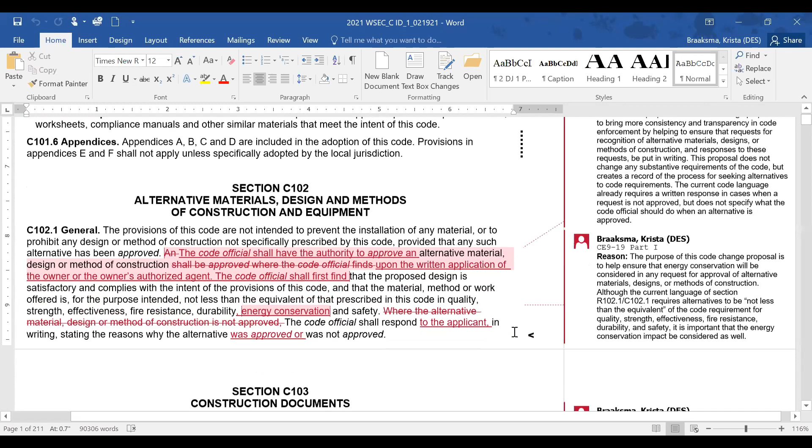So moving on to section 102. There were some minor changes to make the codes consistent in the administrative portions. It doesn't really do a lot to the energy code itself. They did add energy conservation in as one of the goals of the code.

And this just allows digital submissions. So I guess silence in this case means nobody has a concern with the change that we've all gone through. Just to make it clear.

And then specifying that the construction document should include which energy compliance path is being taken.

There was a slight change in the IECC language on air barriers, and I've provided both the ICC language and the current WSEC language. I'm kind of assuming we would continue with the current language, but if people prefer the ICC language, we can go that direction as well.

So can we make those determinations as we're going along right now today? That would be my assumption. I'd hope we would do that.

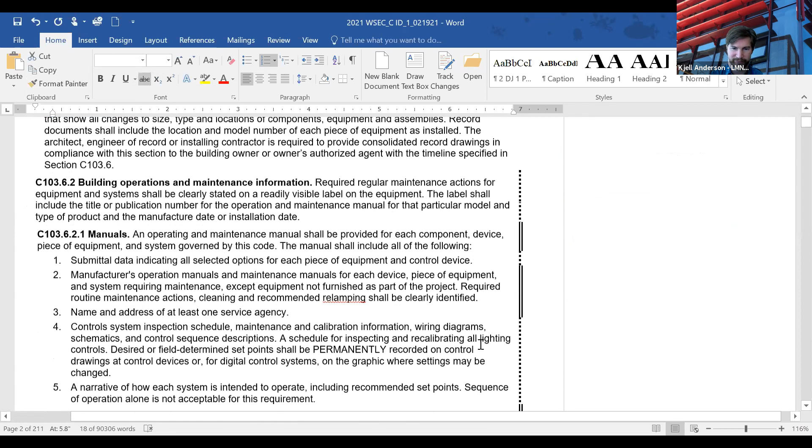And this is just a relocation. Fees got moved up from its previous location, which then bounced down inspections. Inspections did get divided into two different sections, and there's now a new notice of approval section that takes the place of two previous subsections of inspections.

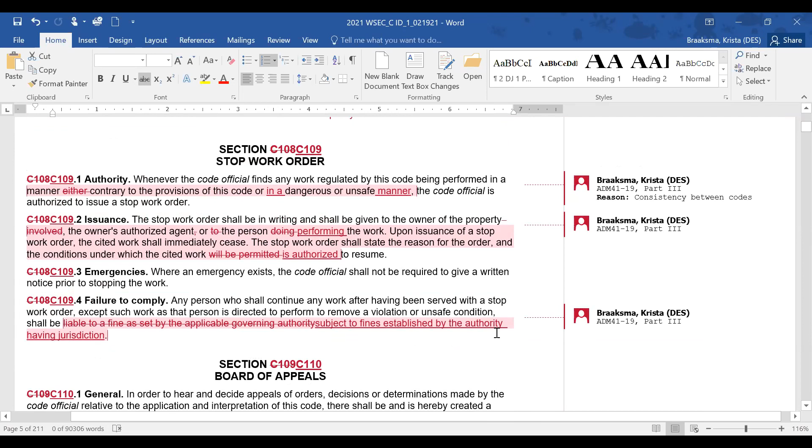And these are just the relocation stuff. Stop work order, again, there's changes just to make it consistent between the model codes. It's pretty much just editorial.

Lisa, did you have a question? You chatted something. Okay. Sorry, I had to unmute.

Actually, this is back, I forget which section it was, when it refers to the energy compliance path. My only question on that one is, is it in reference to section C401, or is it in reference to the compliance path by discipline, like prescriptive versus performance, that kind of thing? Do you know?

This was prescriptive versus performance. Okay, yeah, so that was my understanding. Okay, so C401, the two choices. Okay, thank you. That could be more explicit in here, and I had that confusion as well.

As if we're saying energy compliance path, how are we naming them such that people know what to put in here? I could say energy compliance path per C401 or something like that. That might be clearer. Is that something you would agree with, Lisa? Yeah, I think that would provide some clarity.

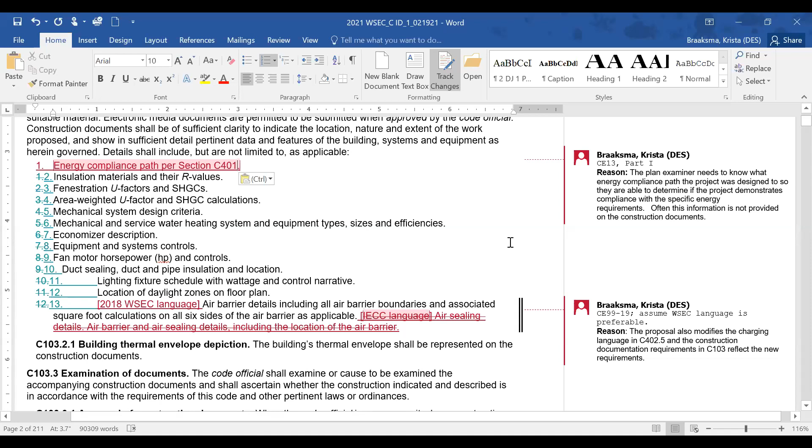So the above grade wall definition took out the word basement from basement knee walls and just called them knee walls.

Sorry, clock in the background. Two definitions were added for biogas and biomass to coordinate with language coming up in another change, it looks like C406.

So if we determine that we don't want to adopt any part of the IECC C406, there's really no need to have these two definitions, but they don't hurt anything.

So just to be clear, Krista, when it says reason, is that copied directly from the IECC rationale, or is that your editorial? It is copied from the original code change proposal at ICC. It is somewhat modified, just to take out a few words here and there to shrink it down. Some of them are several paragraphs long. Okay, thanks, but that's what it's based on.

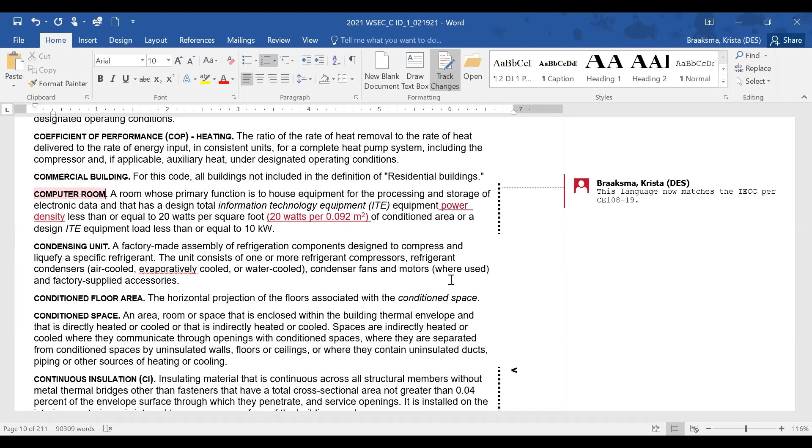Same with data center and data center systems. Well, data center anyway. Data center systems is a little bit different.

So we have a choice here, right? Krista, anybody have an opinion? ICC is a little more specific than the Washington State Code.

Lewis? Yeah, and maybe Mike Kennedy can chime in on this one, but we spent quite a bit of time on the data center last time, specifically for Washington State. The proposal that went forward to ICC came from Washington State. So I think it might be better to leave the Washington State language, but I think Mike Kennedy would have a good purview of this. Mike? Mike here.

I would like to research this offline and come back next time with it. I'm wary of the electrical systems because I know the proponent was very specific that electrical systems should be in there, and that relates to the content of 90.4.

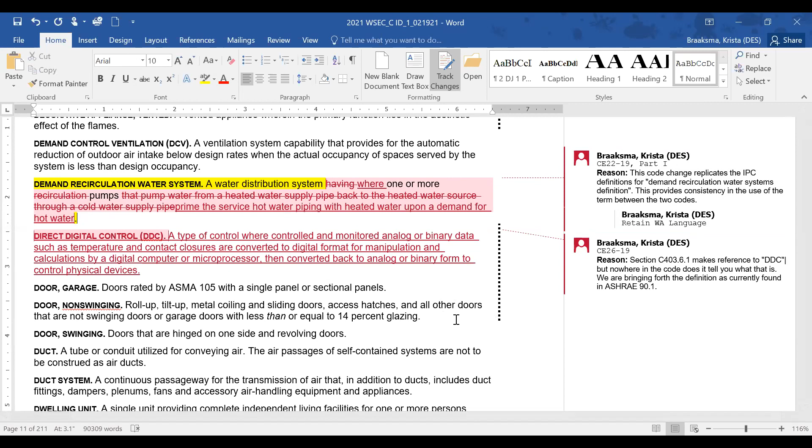Okay, and there's a new definition for direct digital control. A new definition for enthalpy recovery ratio. And I don't know if you'll want to revisit that after we actually go through section C403. That I guess would be consistent with a lot of these definitions. They may need to be revised after we look at the referencing section.

A bunch of new fan system definitions. Sorry, Lewis has a question. Go ahead. Yeah, I'm sorry I missed that. Are we going to revisit these? Like that enthalpy recovery ratio will be probably pretty important for the DOAS section. Are we going to get a chance to go back and take a look at these, or are we making a decision on them now?

I think we can come back and take a look at it later, so when we meet again we can revisit anything we covered today if necessary. Ideally you'd make a note, or when we get to that we'll automatically come back to it if you bring it up. Most of this deals with Washington State code provisions, definitions changing like data centers, or heat recovery and DOAS systems, which were hot topics with lots of time spent in previous discussions. So if we get time back, we'll focus on that and bring it up for discussion later.

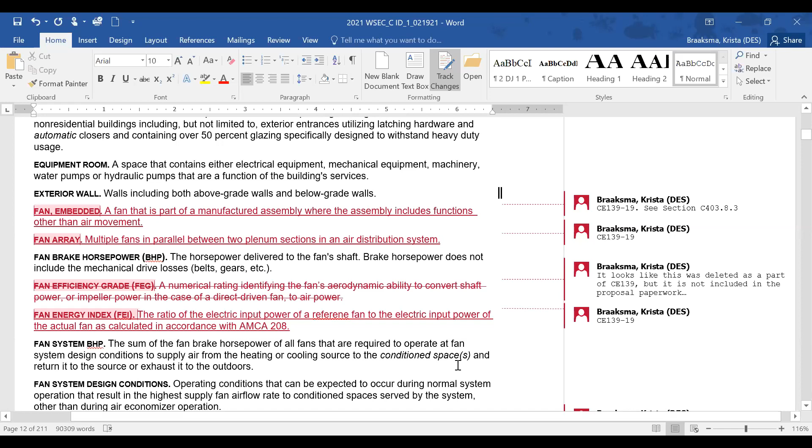And a new definition for fault detection and diagnostics. The fenestration definition for skylights now includes greenhouses.

Luke has a question: Krista, could you scroll back up to the fan definitions? There was a spelling error in fan energy index. There you go, thank you. You're not called the technical advisory group for nothing. It's Luke, sorry, I figured we'd get it now.

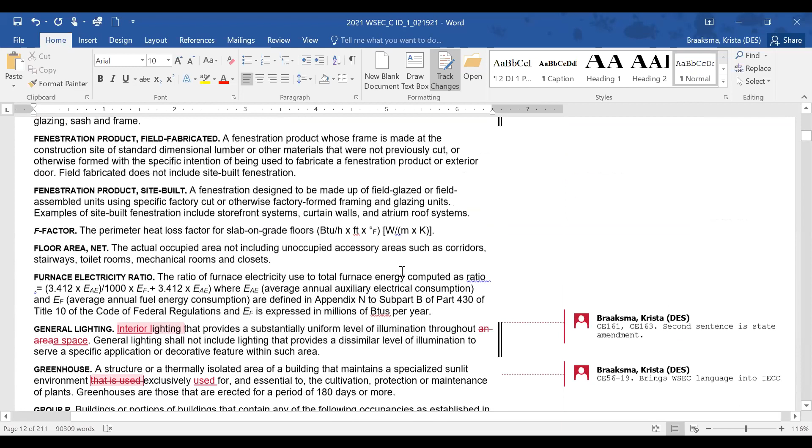The definition for general lighting looped in a requirement that specifically addresses interior lighting and general lighting.

The greenhouse definition is pretty much in line with our current state amendment now, just a minor editorial change. Luke, can you lower your hand, or do you have a question? Amy, go ahead. Krista, can you scroll up a little bit? Yeah, there it is, skylights—I just saw greenhouses was added. I just wanted to make sure it made sense. Thanks.

And the ITE definition is pretty much the same as the current state definition, just reformatted to match the ICC format a little better.

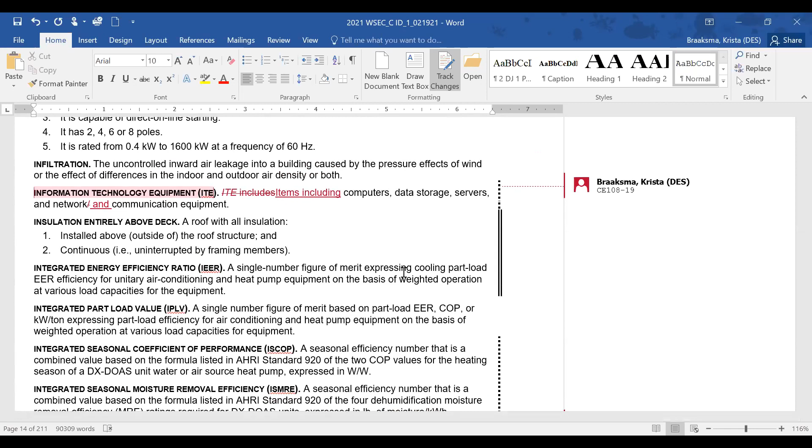A new definition for internal curtain systems for greenhouses, and there's a new section in the fan section for large diameter ceiling fans now, so there's a definition included.

Some editorial changes to networked guest room control systems.

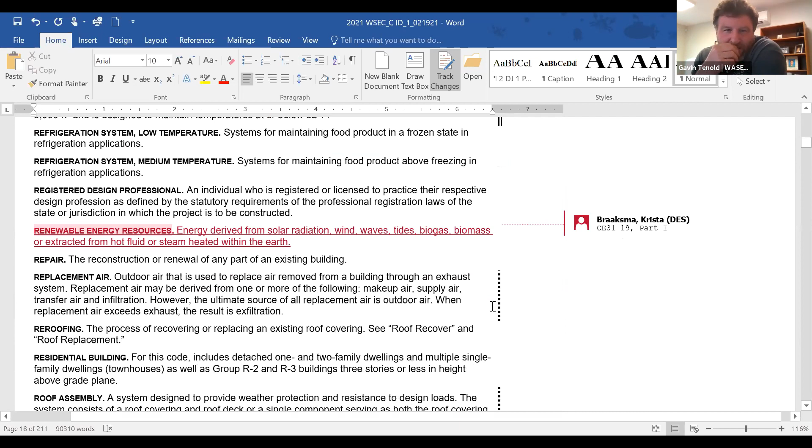Gavin has a question. Go ahead, Gavin. I wanted to comment on on-site renewable energy—sorry, I pushed that button a little too early. So Krista, my understanding is the part crossed out is what had been in our code, and the highlighted part is what's in the ICC code we're looking at including in the 2021 code. So the crossed out portion is the 2018 Washington State Energy Code, and the pink underlined section is the IECC 2018 or 2021. I sure prefer the Washington State language better—just wanted to comment on that. My logic is it's about renewable energy resources, and I think we're opening up an unclear definition there that could turn into an issue. Just to jump in, there is a definition for renewable energy resources added later. So there's one further on in the R's here? Yep. So is this list basically the same list that was in the previous definition? Looks pretty much like it, yeah.

You just have to look at two definitions now instead of one. Does that address your concern, Gavin?

Well, I guess I'm wondering, I haven't read it carefully enough. Does it have the original sources of energy there? Or is there anything missing? Looks like landfill gas wasn't included in the second definition. Unless it's assumed that that's just a part of biogas.

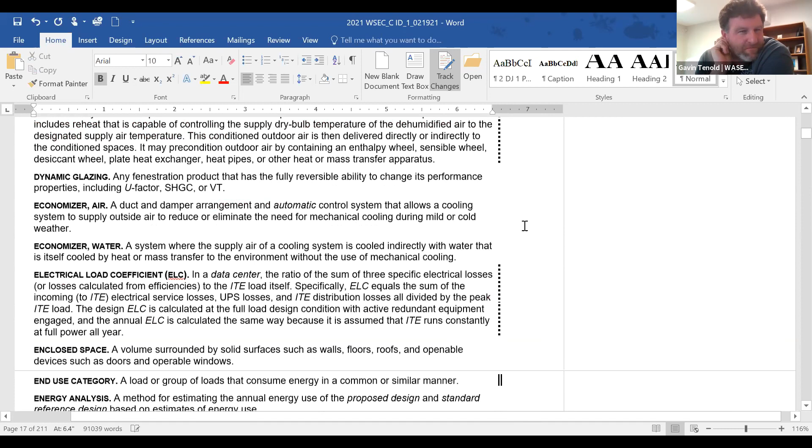That was my assumption, but if others have other thoughts. Biogas to me is something that you're doing in like a digester. Landfill gas is another thing entirely, but I'm not a biodigester guy.

Lewis or Dwayne, I think you raised your hand before, Lewis. Yeah, I think one important difference is that in the renewable energy resources, at the I-code level, we decided not to include biomass, just because the typical building doesn't have enough biomass on site to supply its own energy resources in perpetuity.

Yeah, like you'd need 2 acres of forest maybe, or 1 acre, or something like that in order to actually consider it a renewable resource. Well, in order to harvest it on site. Yep. And so I thought that was actually a good change.

I'm in favor of the new. Okay, perfect. Yes, sir. Thank you very much. Appreciate that. Someone needs to, can we mute that person? Got him. All right. Someone like your idea, Dwayne.

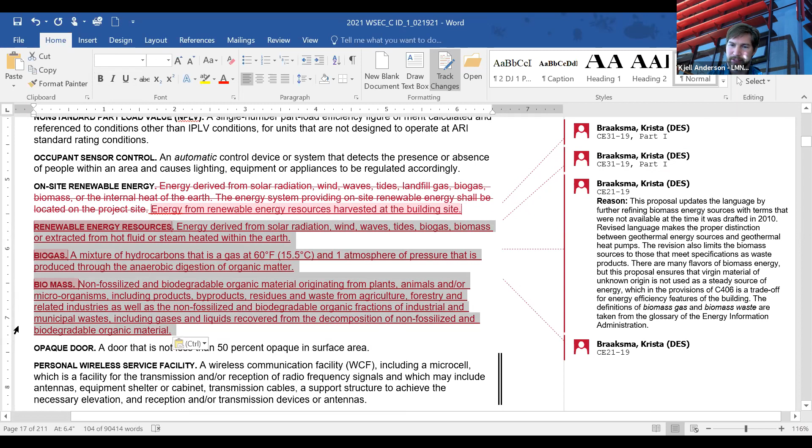So if that's the case, then the new definition seems to be acceptable based on the comments I've heard, because it does include the biogas. Previously, you just have to look at other definitions in order to do so. Does that make sense?

He has questions there in the chat. Dwayne. I just wanted to point out that one of our other usual objectives here is to minimize the differences between the national standard and our Washington code. So here's a situation where, without really changing anything fundamentally in the meaning, we can align ourselves with the IECC.

I agree. Lisa? I'm going to second what Dwayne just said about aligning with the IECC, and also if those other definitions do remain, then I think technically the words renewable energy resources is a definition, so it would be in italicized words. So we've got a definition inside of a definition. But that would be the case there, I believe. That way folks know as they're reading this definition that there are other places to look for additional information, which could help the discussion we just had.

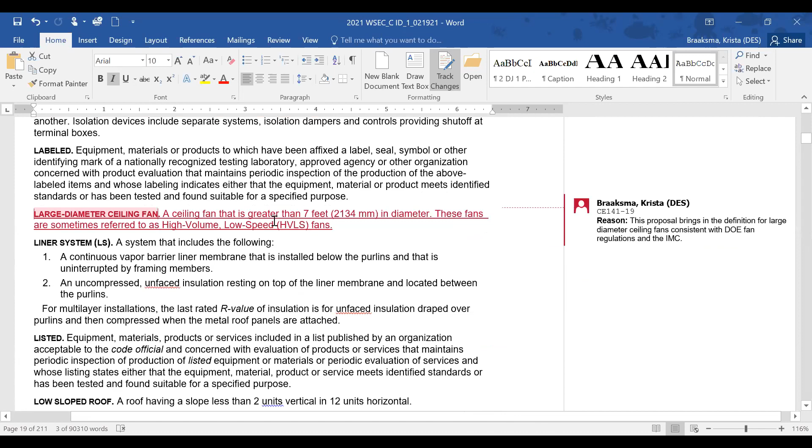Mike Kennedy has something, go for it Mike. I thought this was going to be down on vertical fenestration, but it's up in fenestration, a sub item is vertical fenestration. There's a typo, and I don't know if this is proper to deal with now. There's an error in the Washington 2018 code where doors with no more than 50% glass are considered vertical fenestration. I think that should be more than 50%. That's correct. Or 50% or more, either way. Great.

Okay, and then Alan brought up a spelling typo in TDD. Mike, did that answer your question? Can you lower your hand if it did? Oh yeah. We're all still trying, got training wheels on. Yeah, I think we'll have that for a while. This is kind of a new format for tags, and it takes some getting used to.

A new definition for vegetative roof, but it's in a section that we don't adopt in Washington, for solar reflectance. So whether it's adopted or not is up in the air.

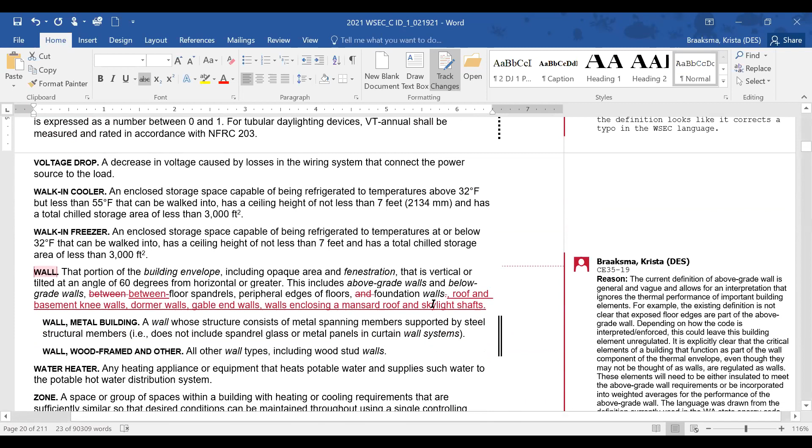So there's a change to the definition for wall. I'm not sure why they put basement back in on knee walls for this one, but above grade wall doesn't include the word basement. Two code cycles ago, or at least one cycle ago, we had a great definition which seems to have vaporized. We had one definition for below grade wall, and the above grade wall definition was from top of floor insulation to bottom of roof insulation, meaning everything in between is wall, and it was golden. This has a whole bunch of stuff in there, but it doesn't exactly say that.

Then we should add that. I don't have my old code books in this office, but if I was in my other office, I could put my finger right on it. That sounds like a code change proposal just waiting to happen, Patrick. Oh really, all that extra paperwork, Joe? Now I have to start making a list.

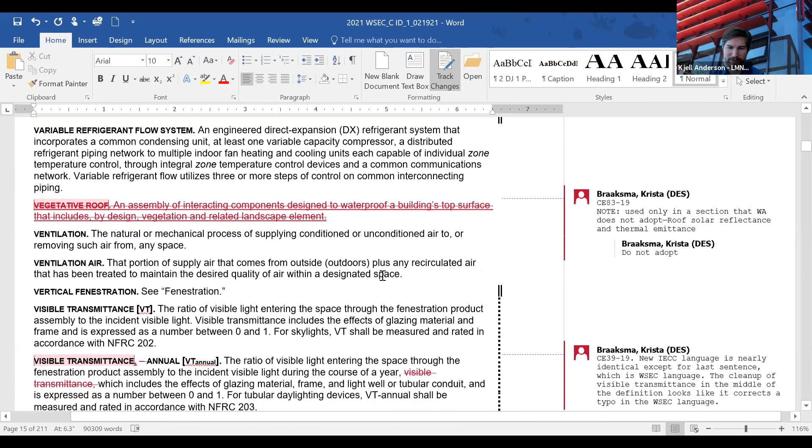Woohoo, we are almost 10% the way through the 211 pages of the code. And there was a new climate zone introduced for Washington. We've got 4C, 5B, and 5C. So you've now got 2 marine zones and a dry zone, which there are some requirements within the code that has a difference between 4C and 5C requirements, and 5B and 5C requirements. So this does have some code impacts.

Some further detail added to the insulation mark installation, on just how you mark items that don't have a printed mark.

Dwayne: Yeah, I'm having a hard time. I'm looking at the IECC climate zone map, and I'm not seeing that 5C. But I wonder if this is appropriate to treat the same way we treated our friends up in the upper right-hand corner in Zone 6, that we made them honorary members of 5B. Do we really want to have a new climate zone for, what is it, San Juan and Kitsap and Clallam? So it's funny because I'm looking at this map and I don't see it at all here.

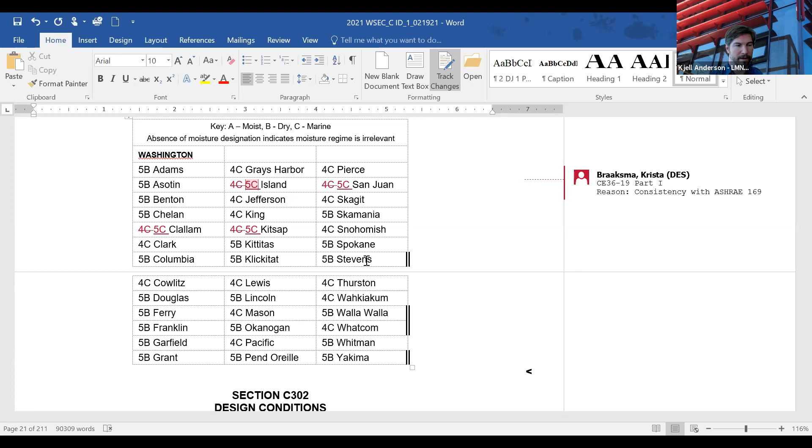Mike Fowler was the next person to raise their hand. I had similar thoughts to what Dwayne was just mentioning. And what I was also trying to recall, is there still a state statute that we have? The state statute says we have 2 climate zones in Washington. I couldn't recall if it was part of why we moved 6B into 5B. And also just to agree with Dwayne, my thought was just saying let's maintain or move 5C back to 4C. And yes, that is still state law. I agree totally. And just for example, like the population of Grant County, which is a large county, is only 40,000 people, and I think these are even smaller.

Well, Kitsap is not, but Clallam.

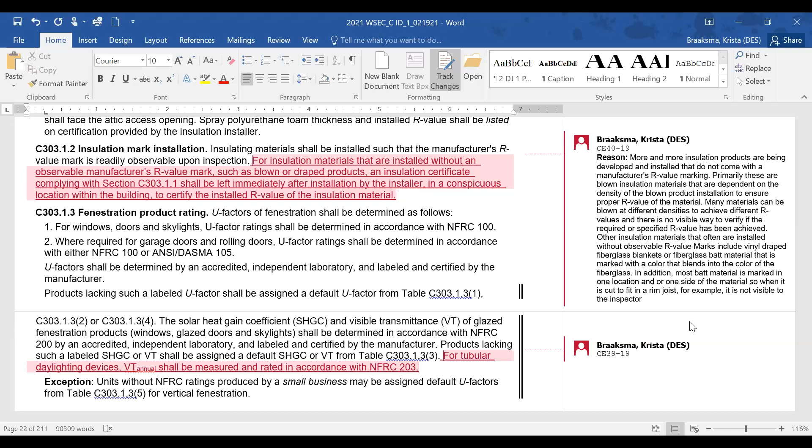So were there any comments on the insulation mark? And the fenestration product rating, just some additional clarification on tubular daylighting devices. And that's consistent with our current state amendments. And that brings us to chapter 4.

And C401.2 was changed around quite a bit. And I'm hoping I caught all of the sections and coordinated them with the Washington State sections.

The total building performance path now includes the IECC version, includes the table for mandatory provisions that are code introduced last time. And the application to existing buildings has been changed into an exception rather than a subsection on this one.

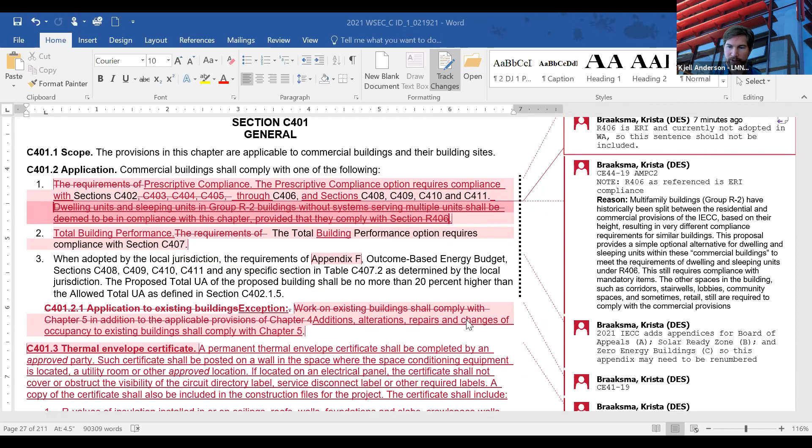Okay, so the inclusion of additions does make it a bit circular because additions under chapter 5 require you to go back to C401 and various other subsections. So I guess, do we feel that if it's an exception in its own pathway, but that pathway then also requires other things under C401, is that so circular that people will be confused or building officials will be confused?

I'll just chime in that I think it really is the word exception that's the issue. If perhaps we just kept it as application to existing buildings, but kept the edit, that might be a little clearer. Anyone who wants to use some emoticons in support or denial of that idea?

I like that idea as well. The titles of sections are not actual code language, from what I've heard. But calling it application to existing buildings is better than calling it an exception, because if you call it an exception, then it is code language. So let's use the new language, but the old title.

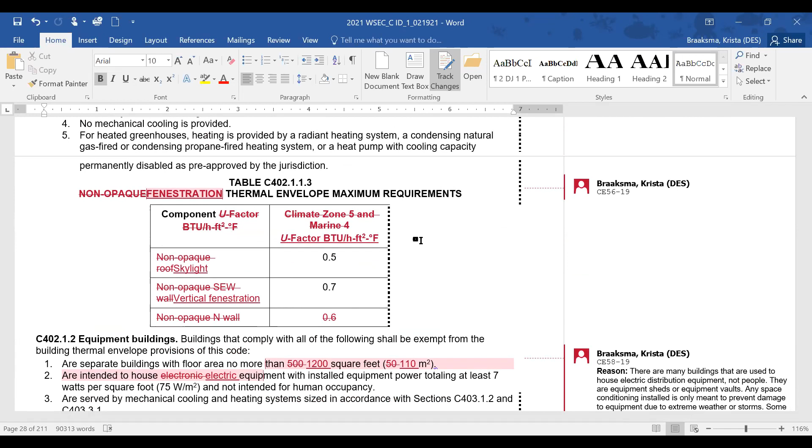Mike Kennedy: I wanted to say, I kind of like the simplicity, but it is a decrease in efficiency, since you're allowing north surfaces to go with 0.7 instead of 0.6. But the simplicity is nice.

Lisa: I have two comments. For this, I would agree with Mike that it is a step back. We could say vertical fenestration southeast and west, and then vertical fenestration north separately. That way we would maintain the existing stringency. It would be a step back otherwise.

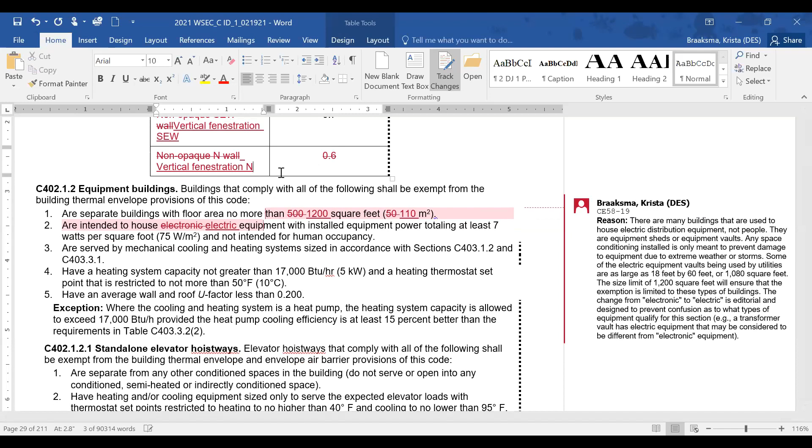While we have the floor, I have a comment about the equipment building section as well. This is technically a decrease in stringency, and the vast majority of these buildings are permitted through L&I, so this is one where perhaps it would be advisable to

consult L&I about this particular change. Does somebody have a connection at L&I that they could get more information from? Yeah, we could reach out to L&I, it would be Craig Sedlak or Kelly Mayo, either one, just to let them know about it and find out their opinion. Sure, that sounds great, I'll send a quick email to Kelly and Craig today.

Dwayne: As to that point, this is a decrease in stringency and we should not put it in there. We're saying instead of just 500 square foot and smaller buildings being exempt, now we're saying 1,200 square foot. This should be somebody's code change proposal and not in the integrated draft.

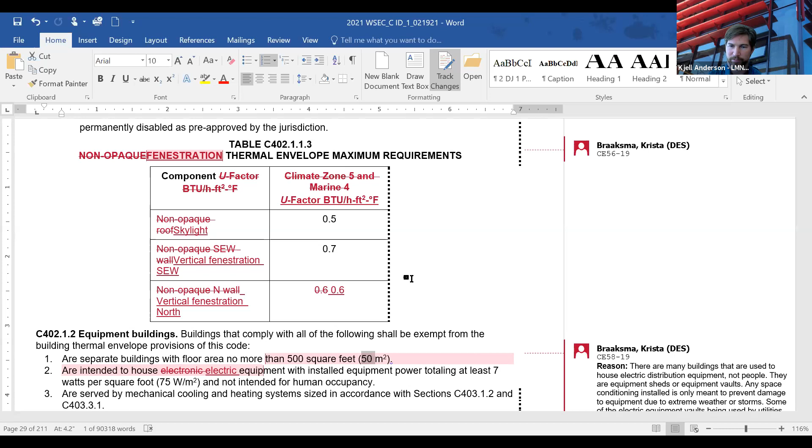So to the point where we don't go backwards, it sounds like we would need to maintain what we had in that table above. It seems we'd need to maintain the 500 square feet and then entertain a proposal to increase it if that's a burden on entities and we have other energy saving measures that would make up for it. Regarding the table above, it would be moving backwards to allow all fenestration to be 0.7. So we would need to maintain what Krista has currently written up there, and then entertain code change proposals to see if the TAG wants to make a change.

Okay. But to Dwayne's point, I guess we can look up whether 0.7 is worse than glazing required elsewhere.

So the next change is on the insulation component R-value method, with just some further specification on multiple layer.

Lisa has a comment. Sorry, one more comment about the greenhouse. I also think it would be worthwhile to confirm that fenestration is actually the appropriate term for what we're talking about, because these are greenhouse assembly types. Is there someone on the call that's a greenhouse expert that could respond? Because I don't believe they were referred to as vertical fenestration in the product search. I'd have to go back and look at that original study.

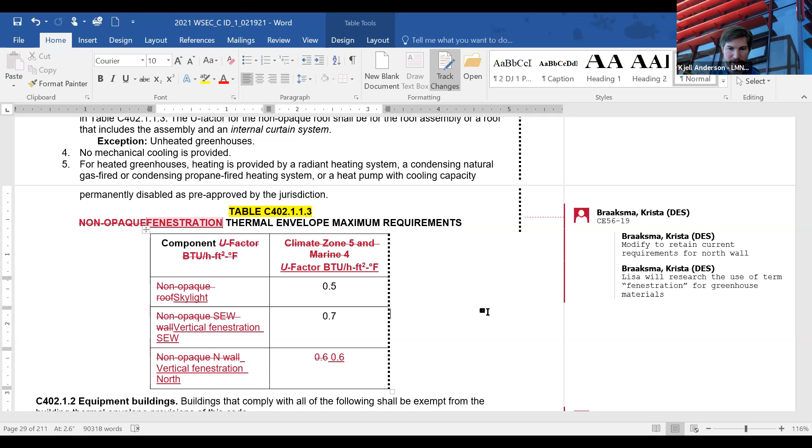Yeah, perhaps we can bring this one back up at the next meeting. We could do some research between now and then. That sounds great. We're almost 15% of the way through the code and halfway through our time. So yeah, I think let's move on and we'll revisit this, Lisa.

Any comments on the insulation component R-value method?

So ICC has some slightly more stringent requirements for metal building R values, and a different assembly for wood framed and other walls.

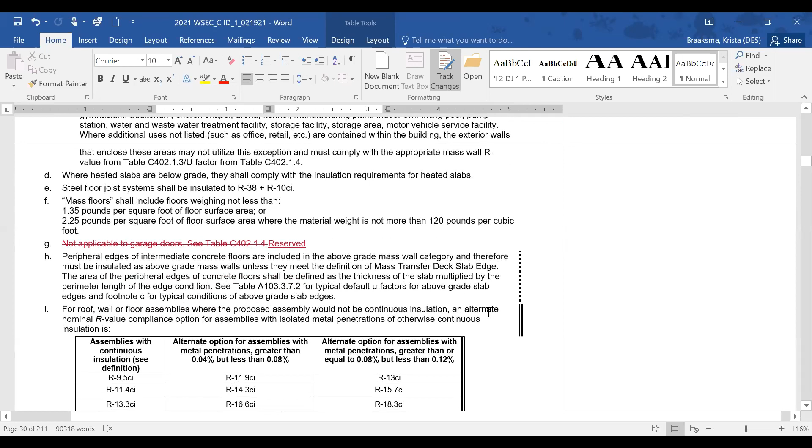And pulled opaque doors off of this table completely and moved it over to the U factor table. And the footnote G went away with that deletion of the garage doors.

A new section was added on roof ceiling assemblies. And the rationale says this was intended to be used for repair and replacement. So I'm not sure why it's here. Oh, never mind, I misspoke reading the actual rationale.

Mike Kennedy. I guess I was not very involved in this, but we have quite a lot of stuff in our Appendix A about not averaging R values, because it's not actually a technically correct way of doing it. It's more of a U value thing. So I'm not sure, I think this might actually weaken the code. I was hoping someone else more involved, like possibly Dwayne in the roof insulation stuff, would be able to comment on that. But anyway.

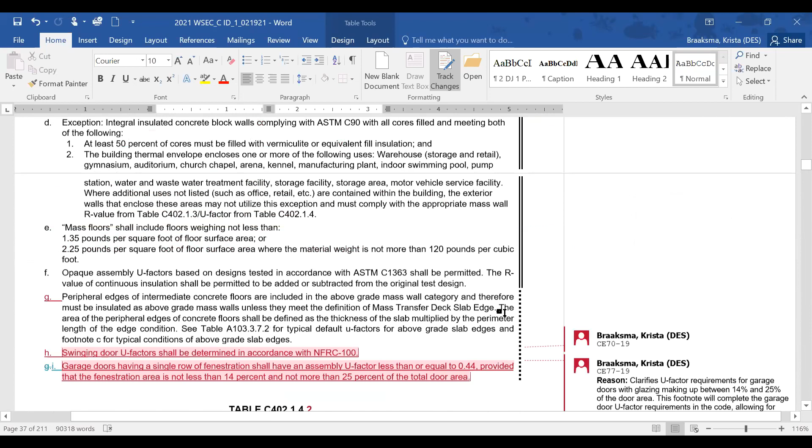Kjell, I think it is moving us backwards. And I have language in the new Seattle code that we worked out with a manufacturers group for dealing with tapered insulation that we put into the appendix.

I would suggest that we strike this tapered insulation thing and I'll make a code change proposal with what we've got in Appendix A. Okay, so we'd strike just C402.1.4.1.1 that Krista outlined?

Yeah. Okay, I think, unless somebody likes that language. Well, whether we like it or not, if it moves us backwards, then we can't choose it.

Okay, that seems reasonable. Mike, you have a question? More a question to Krista, just, I mean, is there a difference to leave it and Dwayne still makes a code proposal in terms of numbering?

I mean, do you have to renumber the draft now, or is it, that's my question, do you have to renumber the 0.1, 1.2, 1.3 below as part of the integrated draft? Or would it be simpler just to leave it and have Dwayne propose it and make the substitution at that time?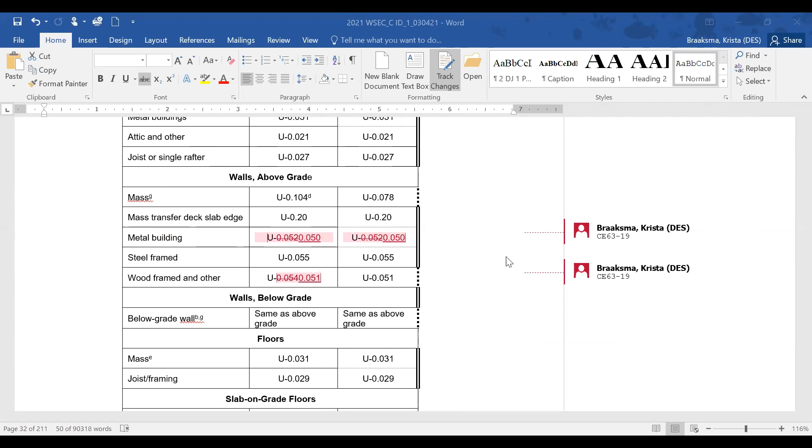Okay, there's a minor clarification to the thermal resistance of cold form steel walls that's just point you to the right table. And some minor adjustments to the U value to match the new assembly types and values in the R value table. And some revisions on the door values and just a little reorganization.

And then 2 new footnotes, one carried over from the previous table, and a new clarification.

Mike Kennedy has a question, comment? Yeah, on the fenestration U factor table, I guess I just was noticing the U factor there is the Washington State 0.38, and the IECC has adopted a 0.36 for, I believe, for fixed.

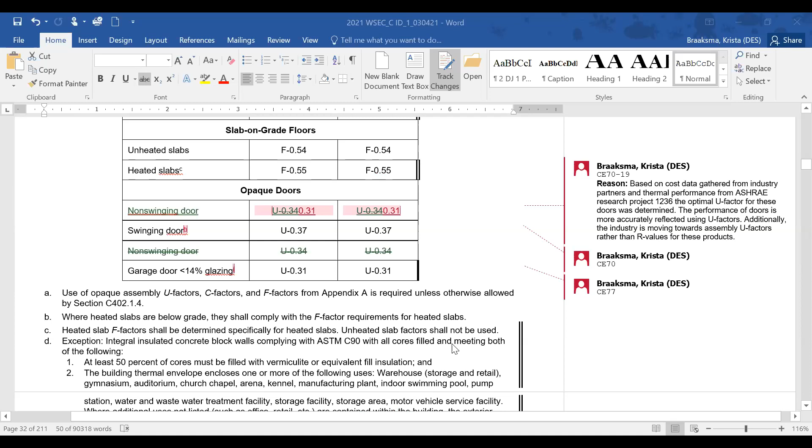Or maybe, so are you down in table 402.4 or? Yeah, 2.4, the fenestration table. Sorry.

The fixed U factor of 0.38 is from the Washington Energy Code, but the IECC fixed fenestration requirement now is 0.36. I didn't know whether that was something we'd want to adopt as part of the integrated draft, so just bringing it up.

Wouldn't that be for all others rather than the Class AW windows though? That was my assumption when I was doing the integrated draft. They don't make that distinction, so all fixed fenestration is 0.36.

What you're looking at in this table is aluminum product, non-metal, metal fixed. So if someone wants to change it from 0.38 to 0.36, that should be a code change proposal. That's the IECC value at this point.

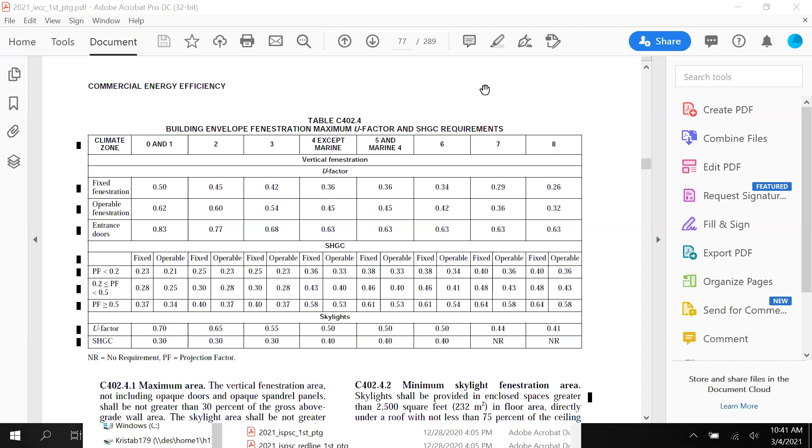I do a lot of window wall projects, and they have aluminum operating casements, and about the best U factor you can get out of them with the best class is like 0.42. So the 0.45 aligns with that.

Entrance doors, NFRC tested, average about 0.58 for a U factor. And when we break out punched opening vinyl in a separate category at 0.30, and then fixed aluminum at 0.38, lowering the fixed aluminum to 0.36 and just leaving our table the way it is would not be bad or a hardship for anybody.

Yeah, I think based on the comments, we need to put this in the integrated draft, the 0.36 for fixed fenestration. And then based on the comments, we should probably also include the operable solar heat gain coefficient that I've also outlined in red into the integrated draft. Does that make sense?

Anybody, everybody? I think I'm going to put in a code proposal. Appreciate that, on my list.

I think the SHGC is only better for operable because there's more solid area taken up with the hinges. Exactly, it's how NFRC in therm, you get a lower SHGC due to the mass of the frame of operable windows. Yep.

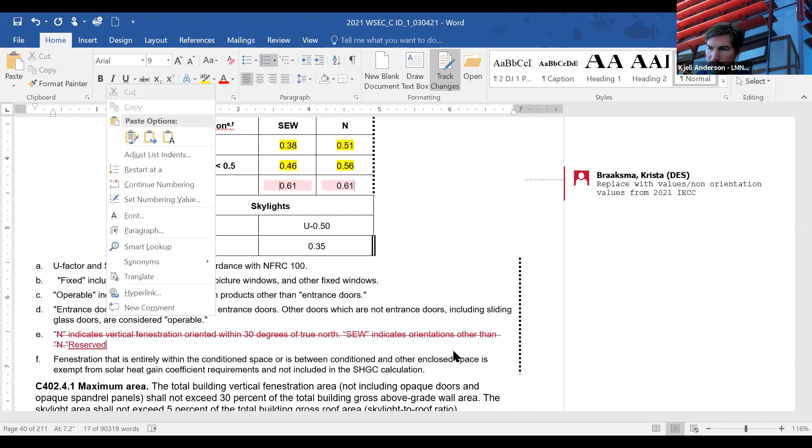Great. I'm glad you're going backwards, yeah, because we had skipped a few things in here. Some additional detail on roof assembly.

And Kennedy, oh sorry, I was having trouble integrating this with our requirements on tapered insulation. So I'm not sure if we should go back to what we had or just wait on Duane's pending code change proposal, or how you wanted to deal with this.

Mike Kennedy, you have a comment? No, I don't specifically on this. Your hand is up. I think if we're eliminating the IECC tapered language, we should maintain the Washington State Energy Code 2018 tapered language, subject to, of course, code proposals.

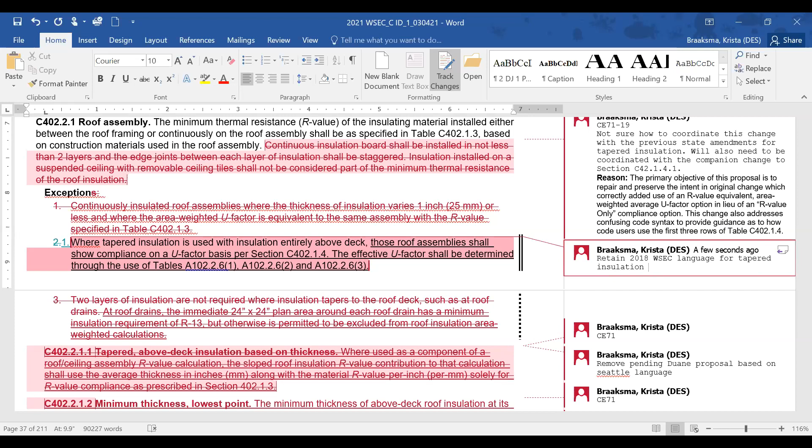Okay, Gavin? Gavin, you're on mute. Sorry, guys. We're not getting rid of the staggering language anywhere, are we? This is just tapering.

Yeah, this is, if we're not incorporating the 2021 IECC language on tapered insulation, we should retain the tapered insulation language from the 2018 Energy Code. Right.

Well, I guess I saw that language down there in 402.2.1.4 where it's dealing with tapering too when you're going into scuppers. I guess I feel like this is a conversation that could get deep.

So you're saying 402.2.1.4, the new language replicates or is similar to other language we already have that we crossed out?

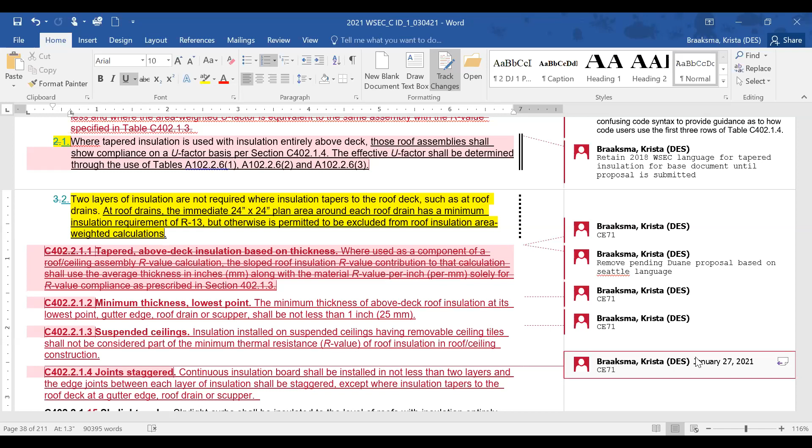Well, the language that Krista's got highlighted is talking about roof drains and tapering. And then 1, 2, 3, 4 sections down, you have the portion that's discussing joint staggering again. And I guess I'm trying to speak up to say staggering joints is really important. And if we're addressing tapering in the previous portion, we need to look at 402.2.1.4 as well. That's all.

Would it be appropriate for this integrated draft to just maintain all of the exceptions - 1, 2, and 3 - and not include the IECC 2021 language, and then entertain a proposal from Duane or others? Would that be more consistent? Because there's a possibility that none of the proposals are accepted, and we still need a document that reads well.

It's something that maybe Duane and I would want to work on together, because between the two of us, we probably see more tapered rigid than anybody.

Does that seem acceptable to everybody, to keep the 3 exceptions and not use the 2021 IECC language below for C402.2.1.1, 2.1.2, 2.1? I guess we might maintain - we would just get rid of C402.2.1.4 and maintain all 3 exceptions. So that seemed like a reasonable path forward.

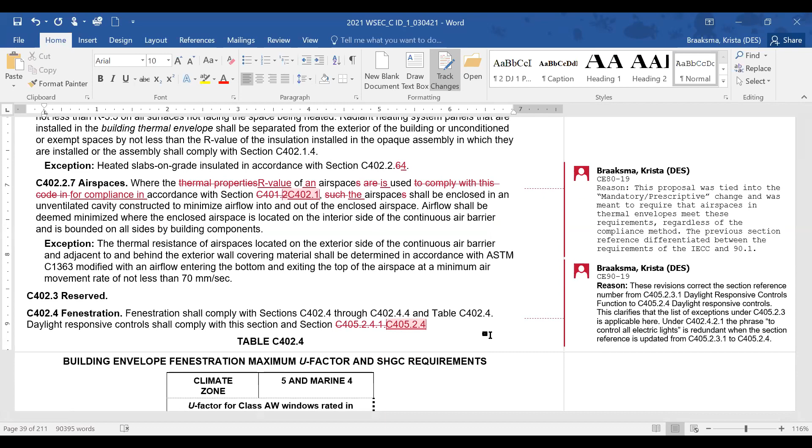Some minor changes to the minimum skylight fenestration area, incorporating the tubular daylighting devices. And ICC went back and forth again, and they're now saying instead of just top lit zone, they're throwing the word daylight back in. So side lit and top lit now include the word daylight after them throughout the code.

And a new exception added for storm shelters complying with ICC 500. You don't need skylights in them, which is probably a good idea.

And just some minor tweaks.

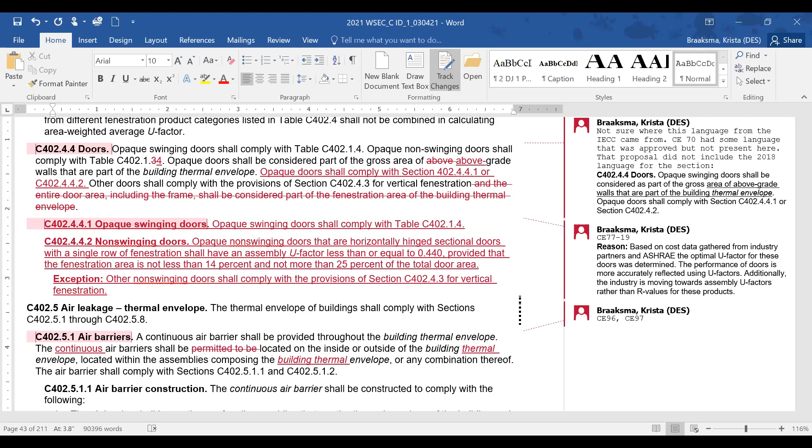I feel like there's overlap here in this 14% to 25%. That's the garage doors.

I'd like to take this. I may have comments on this next time. I'm going to look at it.

Okay, thanks. I'll just say one thing. I can't remember the last time I used a non-swinging opaque door. We use roll-up doors and they fall into a different category. A non-swinging opaque door to me is like a hollow metal door that is never opened, and you just don't do that.

No, it's a defined term, Patrick, under door, non-swinging. I guess my question is, do we need it? You know, opaque door, whether it swings or not, is an opaque door. But it's considered opaque if it has less than 25% glass in it, which is not entirely opaque. But there's only hinged section doors.

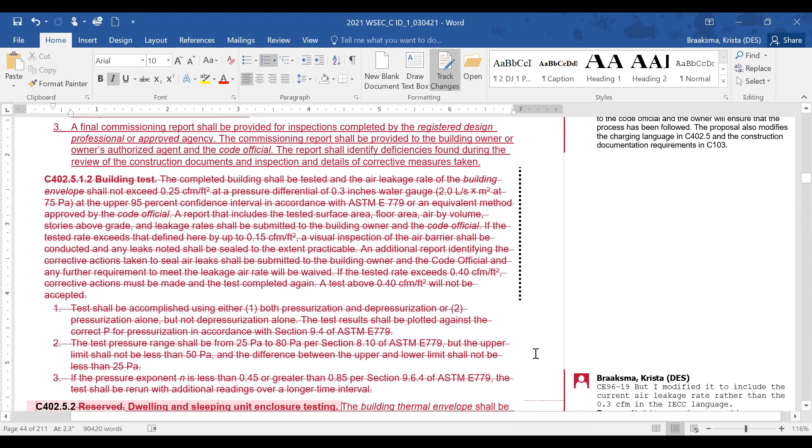And then the building test was divided into the two sections. Mike - yeah, in the second section, the metric equivalent listed for 0.25 CFM is 2 liters per second, but that's actually the metric equivalent for 0.4 CFM. I believe the correct number should be 1.27. And I don't know where the 1.5 above came from, but that should also be 1.27. If anybody wants to check my math on that, that would be great.

But those same changes will need to be made in C406 as well, because I think that's where the 0.25 was, and then we go to 0.17 there. I guess when we switched from the previous language to this, did we miss anything? Is anything missing that was there before that is gone now?

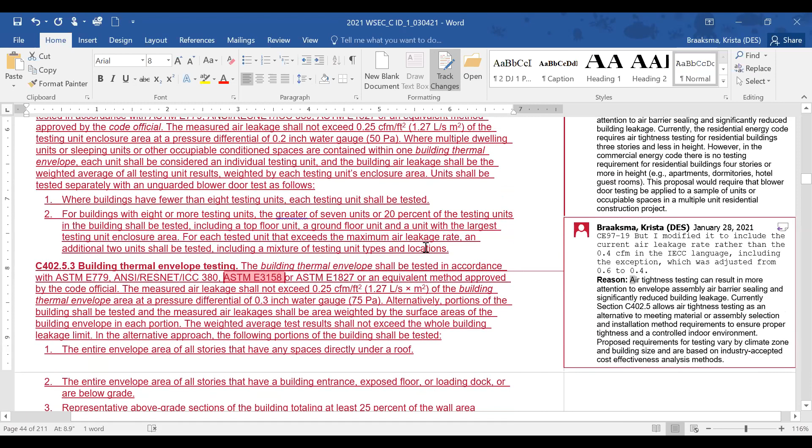...but it's under the exception, and that only applies to the 5.3, not to 5.2. Correct, which might not be correct. Seems like we'd want the 5.2 to have to go through the same hoop.

Yeah, it feels like there's a little something missing here, but as I said, I think it's gonna take a more thorough read to figure out where those pieces need to go. Is this something that the tag would be able to revisit the next meeting? Yes, or okay, yeah, we can revisit it.

And so Mike's going to do some things, maybe you also want to do a few things and bring your research. Okay, next time. Yep, we'll do.

And here's a big one: requiring interlocks for heating and operable openings.

Mike, do you have your hand up? Do you want to say something? And Dwayne, this one's pretty cool. It says, and I think we have something very similar in the Seattle code, it says if you prop the door open for more than 10 minutes, the heating and cooling set points to that space that the door is open to change a lot.

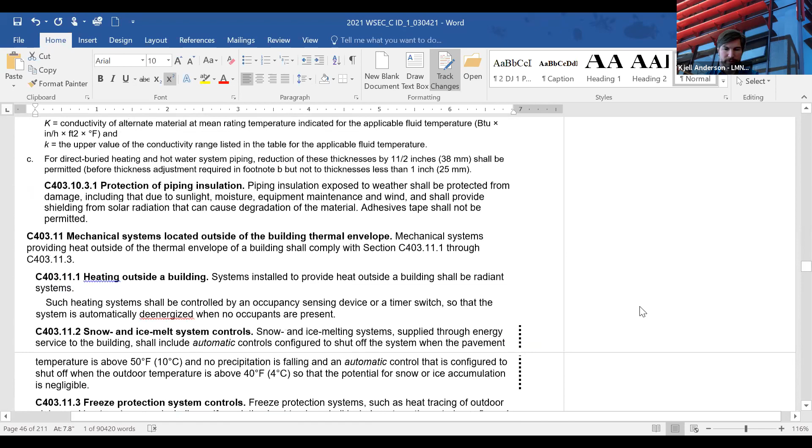Alan has a question. Yeah, I was thinking that for disabling the cooling, it might be helpful to just, instead of raising the set point to 90 degrees, just say cooling is disabled, period. And then for the 55 degrees, it feels like that could go lower, down to 40 degrees as an example, just to stay above freezing.

I think that's a good code change proposal. I guess I don't know how much ability we have to do that in this today. Okay.

So yeah, the 403.13 does pretty much just duplicate that paragraph. Yeah, and the original code section that talked about this was not there, it's somewhere else. I'm skimming trying to find what code section number that was, but it's possible that some of this language is actually in 3 different spots, saying all kind of generally the same thing.

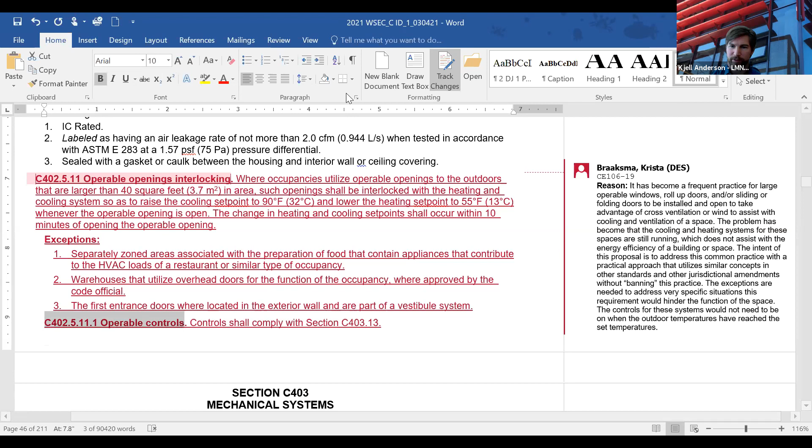So that might be worth looking into that. Okay, well, we're going to go through the whole code so we can flag that as we go through it. There are different setback temperatures for other reasons. But yeah, let's see if this 90 and this 55 stay consistent for operable openings, and then we'll continue this for public comment.

Keep it in for now. It doesn't move us backwards. David.

So is the interpretation that this would be more than 40 square feet of total operable openings, or just a single opening, such as a double leaf door or larger that is confined to one opening?

That's a really good question. It's plural, operable openings. I think it needs to say single, or per 40 square feet, or like a fenestration product that has 40 square feet of opening. No, I would say it's just the opposite, that what this says, but maybe doesn't say clearly enough, is that the openings, plural, to the outdoors are larger than 40 square feet in area.

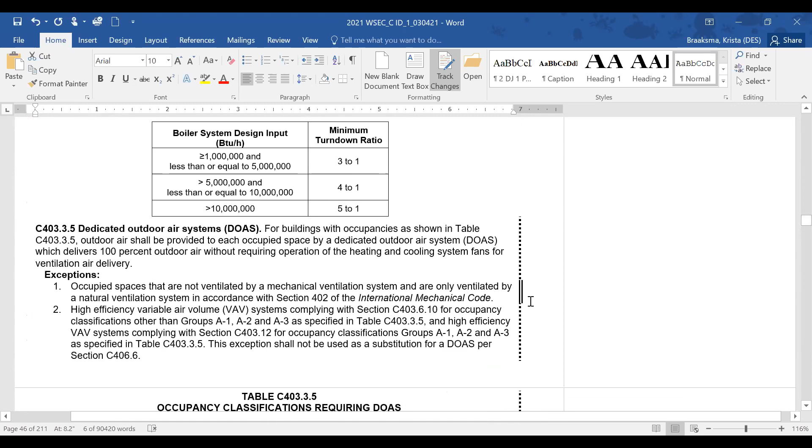Or Lisa. Hi, I found the code section in mechanical that's dealing with the same general topic, it's section C403.4.1.6, door switches for HVAC system thermostatic control. Now it doesn't define an area scope, so it's a little different, but it does set a temperature range of 55 to 85. So I think these 3 sections need to be looked at collectively to make sure there aren't any conflicts between them.

For 5 minutes. Nope. 5 minutes and 90 degrees, instead of 10 minutes and, or 5 minutes and 85 versus 10 minutes and 90. Okay, good catch, Lisa.

And then when we go back to the prior section, we should make it clear that a single opening is over 40 square feet. That's pretty small, considering your average roll-up door that goes on these projects to produce this kind of environment is 10 by 10, which is 100 square feet. Yep, and we use operable walls that are always larger than 40 square feet, always. So I think that's a good thing we can add to the prior section we looked at.

So, Kjell, I think actually that the section in C402 is something very simple without any degrees or minutes or anything like that. It says that openings over 40 square feet have to comply with section 403 point something, and then you could be done just saying that, instead of having all this detail in 2 places.

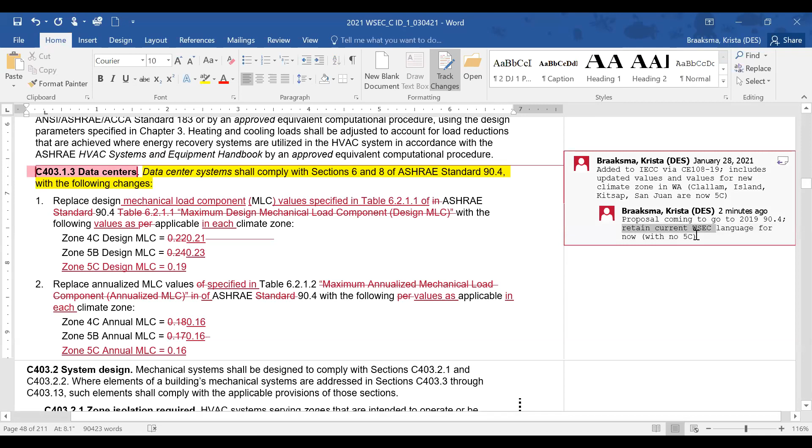That if it doesn't matter, and based on what's been said, why don't we leave it as marked up by Krista, except for deleting zone 5C, because that doesn't exist in our code. Okay.

So new requirement for fault detection and diagnostics. I guess I had a question about this. Is if a new building is over 100,000 square feet, but they have 5 different HVAC systems, does this apply? And is it intended to apply? It seems unclear to me. Mike.

Mike Kennedy? Put your hand up, but I can't hear you. Sorry, I was muted. I interpret it, just because it says system serving GSF of 100,000, that it's the system. My concern would be, is a hydronic system, is this the air system? Is a condenser water loop that goes through a 200,000 square foot building that serves individual heat pumps get triggered by this? And likewise, a big DOAS system. Now it seems like that's not totally clear here, and that'll be a question that comes up with this language. But.

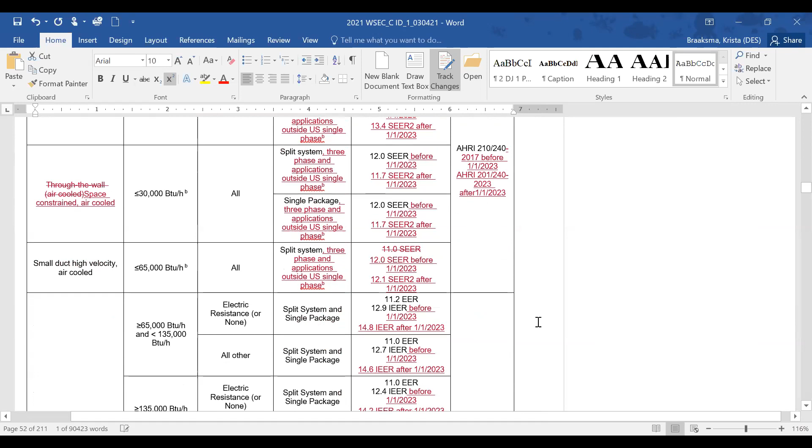So these are all the updated table numbers. They're now in the same order as they appear in ASHRAE 90.1 and should have the same values.

And a lot of the footnotes changed. The chapter reference just goes to a generic reference to each standard. The NAECA reference was changed to be a little bit more generic as well—well, actually less generic. They're actually referencing which CFR, and then a credit to where exactly it's found in ASHRAE, and that's pretty consistent throughout the tables.

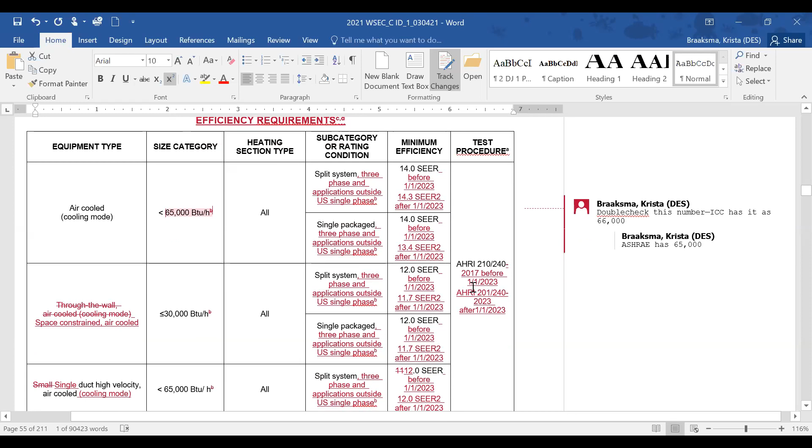One typo in the ICC version that I fixed here. These entries on the table were extracted into a different table.

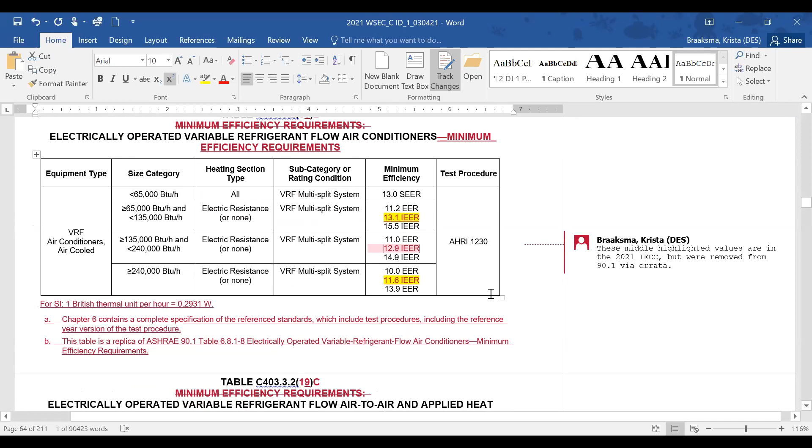And then this is the one where the highlighted values went out of the ASHRAE 90.1 via errata, but they're still appearing in the IECC right now. I'm guessing they will be deleted out when ICC does their first errata for the energy code. And here's another section where they're deleted out.

Mike Kennedy has a comment: aren't those in that table we were just looking at that has two IEER requirements—I think those were VRF cooling? Yeah, I'm not sure it makes a lot of sense to have two values. And isn't the higher value here already in the Washington code? Yes.

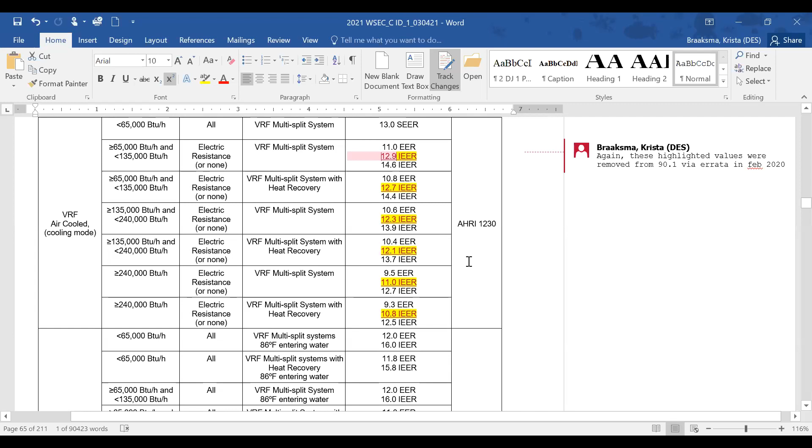But yeah, those are the ones that were eliminated from 90.1 via errata, so they will be going away. I just hadn't done that before this, so I wanted to highlight them so everybody knew they would be going away and not just disappear.

And on most of them where I had notes to check, I did go back to ASHRAE to double check things, and went with what ASHRAE had.

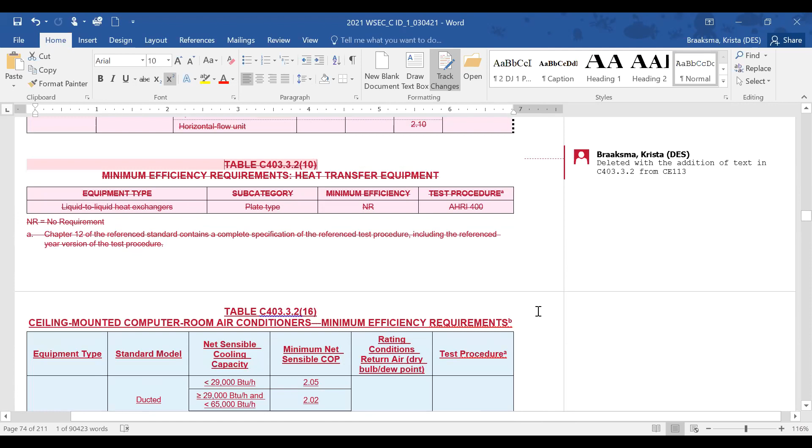That's all the tables. Did you catch the double COP in table 9 for the VRF heating efficiencies? Yeah, that was another one that was an ASHRAE errata.

So I have a question about whether these are referencing directly 90.1 in past code cycles. I would guess there's at least one item I'm thinking of—we've adopted essentially material that's coming out in the next version of 90.1, which actually comes out before the Washington code but after our deliberations, and it's generally available to us to add. Is that going to cause a problem now that every table is explicitly locked into a specific version of 90.1?

Could I take a shot at answering that? I think the council rules allow for next year to make changes that result from updates to reference standards. So we can do this as best we can now, and then when the next 90.1 comes out, if it's in time for a cycle, the council could adopt the most recent 90.1. Do I have that right, Krista?

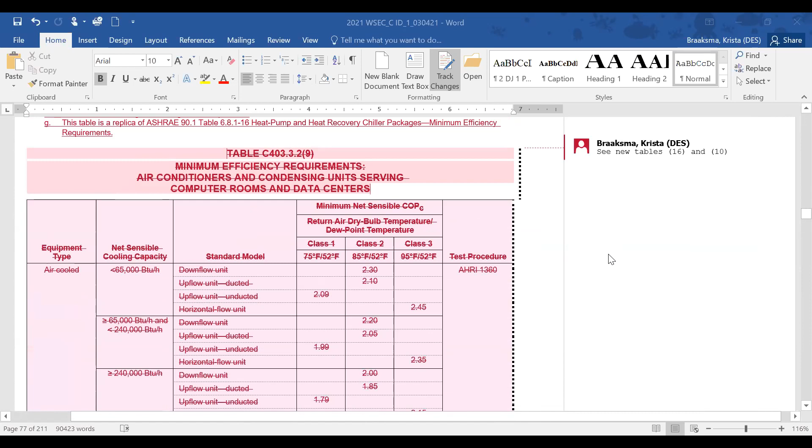The interim stuff is really for more coordination issues within the codes rather than coordinating with published reference standards. I think we did say it would be okay for correcting errors and omissions and for integrating updated standards. We'd just need to be very careful about noting in the footnotes that it's referencing a different standard than what's in the reference standard chapter, because I don't think we'd want to change everything—that would be more workload than we could do in an interim to update everything to the most current ASHRAE version. That sounds right.

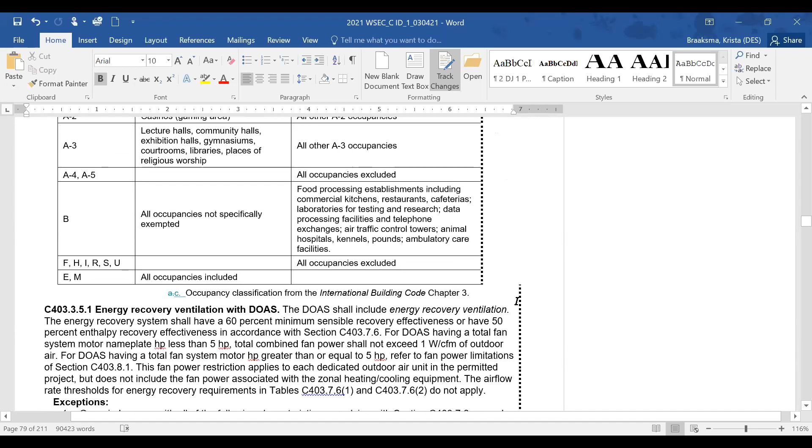The ICC had different language for the heat pump supplementary heat. I retained what we currently have, but noted what is now in the 2021 IECC. If there's any desire to change it over, it's a lot closer to what we have now, but still doesn't quite match the Washington language.

Krista, you're... oh, Mike McGivern, go ahead. Yeah, I had a question about this—as we're reverting back to the fault detection section in C403.2.3, I was thinking it might be better suited to be in C403.4 under HVAC system controls, even though we decided to leave it as such initially to allow for public comment. Just looking for input on that.

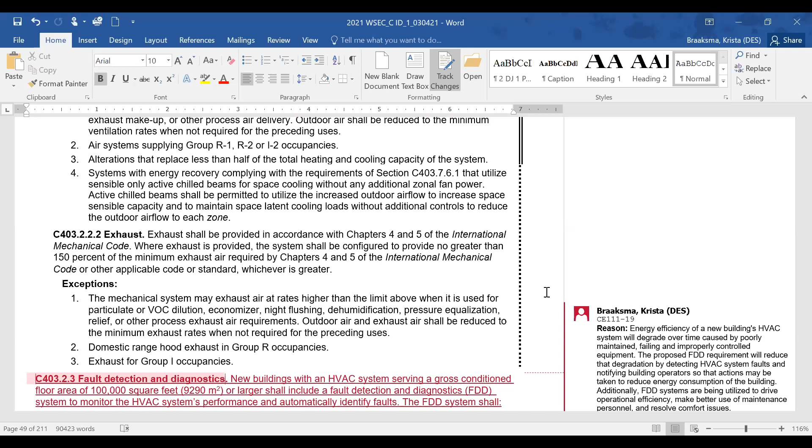I would say that's more a code change proposal. Okay. But it's up to the tag if there's consensus to do that. David.

So I missed which section the suggestion was to move it to, but 403.2 is a group of mandatory requirements for HVAC systems, whereas other sections may not necessarily be referenced as mandatory. That's an important distinction, and you're talking primarily like under C407 or something? Yeah. I think other sections reference the entire C403.2 as being mandatory. And although it's possible to reference other sections in like C407, for example, it just needs to be covered if it is moved.

Okay, well, why don't we suggest that it's a code change proposal, and hope that, Mike, you suggest that over the next couple months.

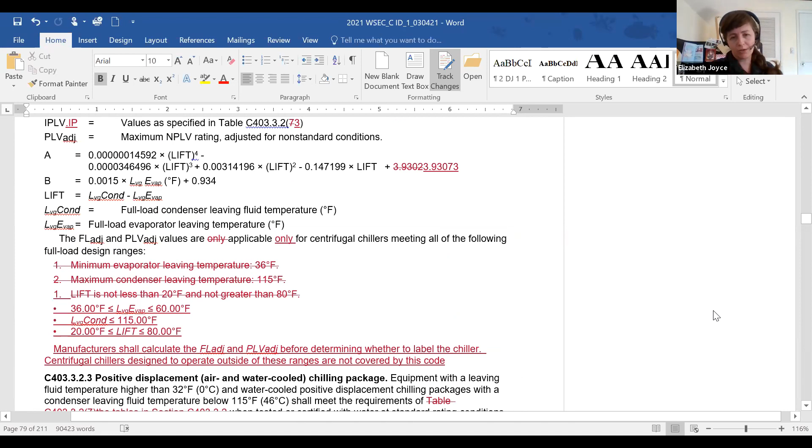Elizabeth has a question, or a kind of comment going back to the heat pump, electric resistance heating discussion, if we're ready to go back to that. There were a couple of similarities, but also a couple of key differences between the current language and the proposed language. I think especially a page or two down, Krista, it seems like there would need to be some sort of closer look at this, because there were some, I think, not insignificant functional differences.

So heat pump supplementary heat, right? The existing language talks about startup, setup, defrost, as well as indicators. Whereas the kind of new CE 116 language talks about defrost, but also talks about malfunctions, which I think would be important to potentially include. So all that to say, it seems like this would need a little bit of a closer look, or possibly combining some of these points.

So if in the sentence with all the commas in it, startup, setup, defrost conditions, if we added a few phrases to that from the CE 116, would that adequately address that? Or is this something we should think about as a whole and then mash the two up and come back next week with better language?

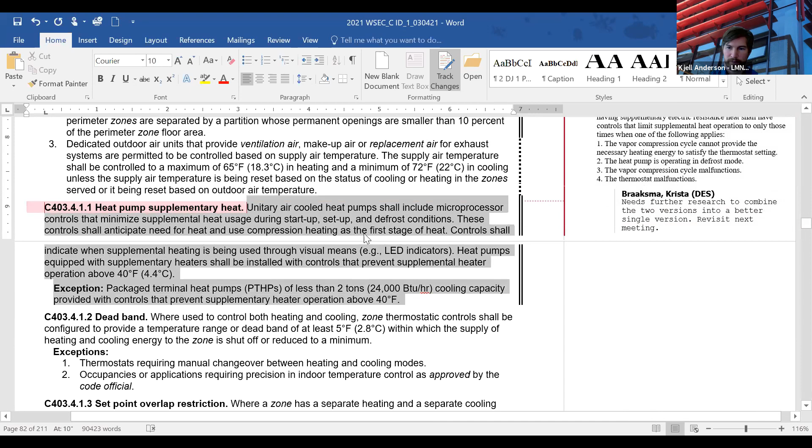And there's just this one section that Lisa mentioned needs to be coordinated with the other two sections. Determine whether we want to have the square footage associated with it, if it should be 5 minutes or 10 minutes, and what temperatures we want to use. And if this section goes away and we just go to 403.13, or how we want to integrate that together.

Okay, I guess Lisa also asked a question via chat about zone 5C. So you want to ask your question and we'll see if we can address it. Lisa?

Yeah, actually, this is more like when we're getting ready to wrap up, so I don't know if now is the time to ask it. It was something I was going to ask because it loops back into our discussion earlier today about 5C, because I did do a quick document scan. I found where 5C is referenced, and it's actually with regards to C406. So it gives us something to think about for the next meeting. I'll let you decide when you want to cover that. If it should be covered today, then there's no time like the present.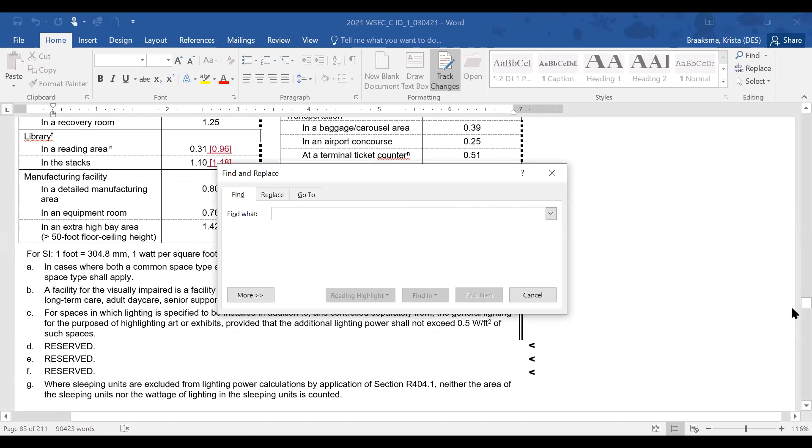Okay, so maybe when we cover C406, would that be an adequate, appropriate time to cover 5C? I think so, yeah, because based on what we talked about at the beginning of the meeting, on really how much it implicated, if we were to take it out, how big of an implication that would be to the code. Going through 406, I actually think it's more substantive. So yeah, it should be a key topic for the next meeting. Okay, sounds good.

Yeah, let's go back to where we were and we'll keep going, and then we'll talk about it when we talk about C406.

The IECC has new language on automatic start and stop. A lot of it is similar to the changes we put in last code cycle, but there's a considerable amount of new language added. I couldn't determine how much I should include, if any, so I left it completely as Washington state language but provided the IECC language in the comment. Does anybody want to volunteer to do some homework on this?

Hey Joe, this is Nick O'Neill. We introduced this language in both Washington and IECC 2021, so I'm happy to help out where I can. The concern from IECC was that it didn't specify automatic stop controls were for DDC-based systems, so there's additional language to clarify that. We could align with IECC on that for more clarity, or leave it as is. I don't think there's a huge concern, but the simplest thing would be to align it so there's no ambiguity over where we intend these systems to operate.

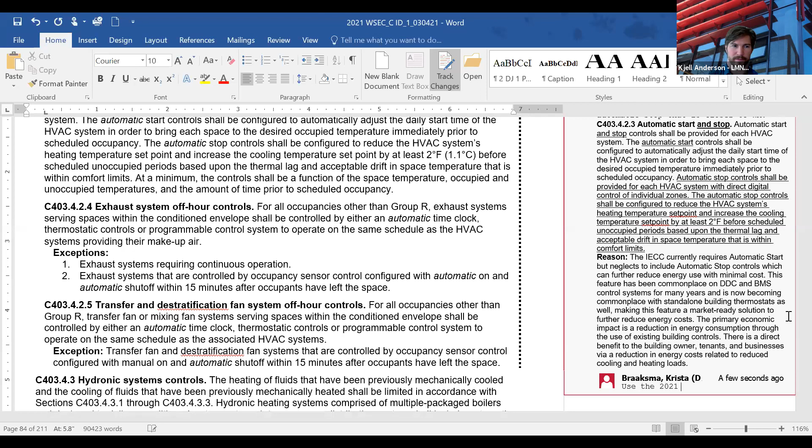Anybody have any more comments on this, or else we can just adopt the IECC language? Okay. Thanks, Nick.

So there was a new exception added to the economizers, but we've pretty much got it incorporated with all our current exceptions for DOAS systems.

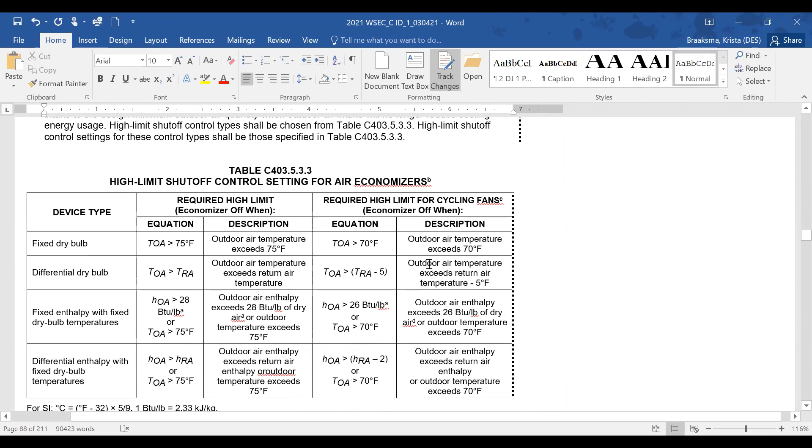So the supply air temperature reset controls had some changes. They deleted one of the exceptions and added language on allowable resets. The original language also had a bunch of dehumidification stuff for the more tropical and hotter climate zones that weren't applicable to zones 4 and 5.

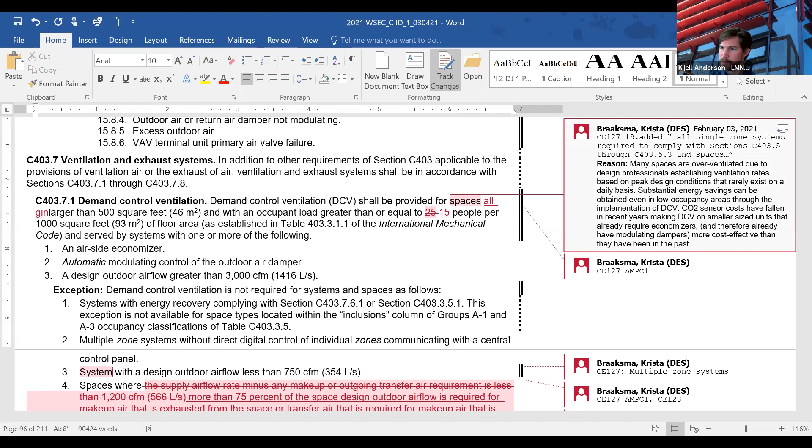Okay, I noticed in the comments on the right, it referenced ASHRAE 90.1 2013. So I guess hopefully it would also align with the language in the version of ASHRAE 90.1 that we're going to eventually adopt as well. Do you know which version of ASHRAE 90.1 it aligns with?

You're talking about the comments for the exceptions? Yeah, they're not on the screen now, but they're just below that. Yeah, I mean, I have the 2019 version of 90.1 up, and that looks like it aligns. I can look at it closely, but those were changes that were made, I believe, in 2016. Okay, I just looked in the comments. It looked like, okay, ASHRAE 2013 and later. Okay, great, cool.

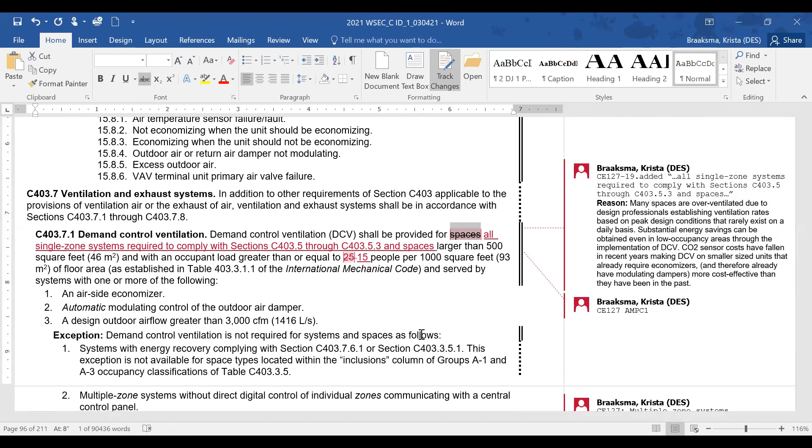So we'll go with the IECC for the integrated draft. I just would have to check those section references there because I think those are IECC section references for 3.5 through 5.3. It's supposed to be the economizer section, so just a note on that. Consistent with what we have. Great.

Mike Kennedy: One issue with this language is I'm not sure it plays well with DOAS and the requirement for DOAS in Washington. We'd be requiring the HVAC equipment to have this, it seems like, but not necessarily even if it doesn't provide ventilation. Anyway, I do wonder about that, whether that needs a little more thought in relation to DOAS.

Hey Mike, would you qualify DOAS as a single zone system? Well, my main concern is that you might have a single zone heating and cooling system along with it that also has an economizer, but it's not providing the ventilation to the space. I'm not sure how I think of it, DOAS could go either way, whether it's single zone or multi-zone.

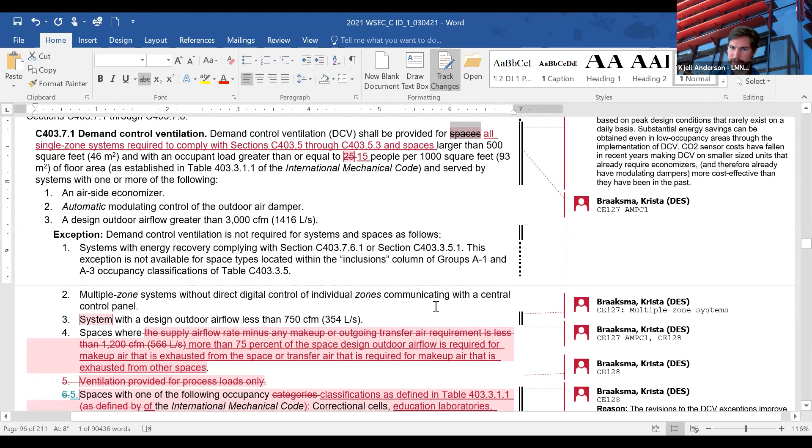Certainly, we can take it up again next Friday between 8 and 11 in the morning. Sounds exciting. Yeah, coffee. Although codes are exciting as they are already, so. At least to the people on this call. And I fully appreciate all that. All right, so I guess to be revisited next week. I think there's a preference maybe to go with the IECC language, but we can revisit this again.

And Mike and Louis, you both have your hands still up. I'm sure your arms are getting tired.

Temperature set point controls was modified a little bit to break it up into points rather than have one big paragraph, to try to make it a little bit clearer. This is for guest rooms. And the ventilation controls went from automatically turning off after 30 minutes to 20 minutes.

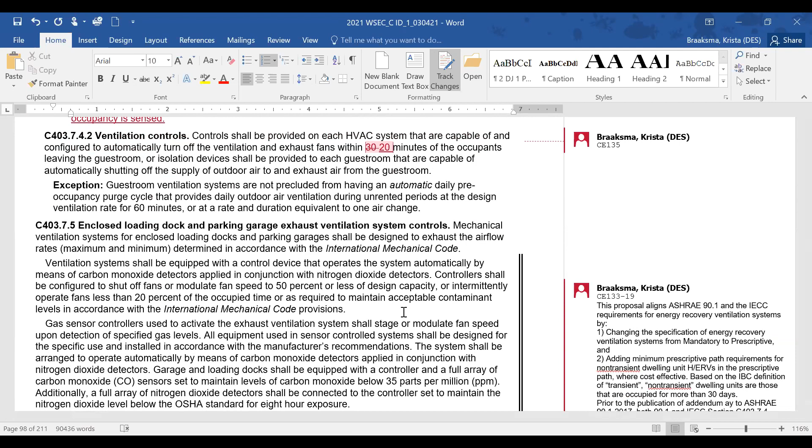This may actually take a little bit more time to go through than we have left today, so this might be a good breaking point. I agree. So we'll start here. We almost made it halfway through, but as you mentioned, there's a few sections we will be addressing in great detail.